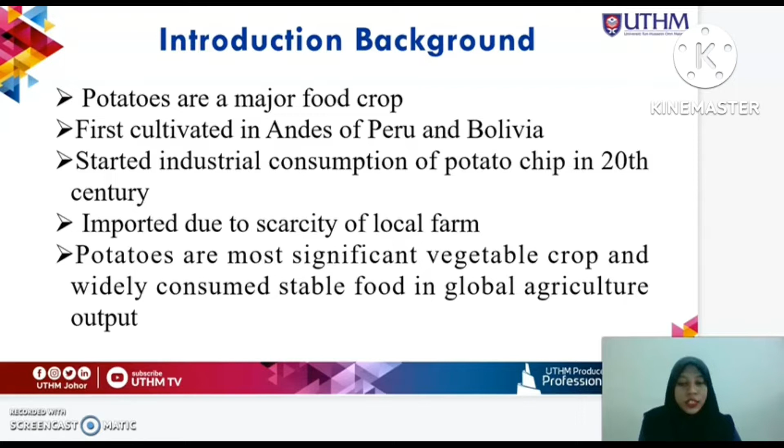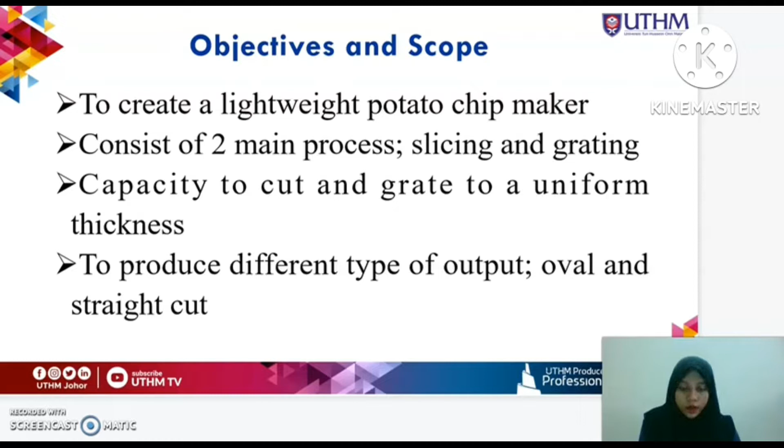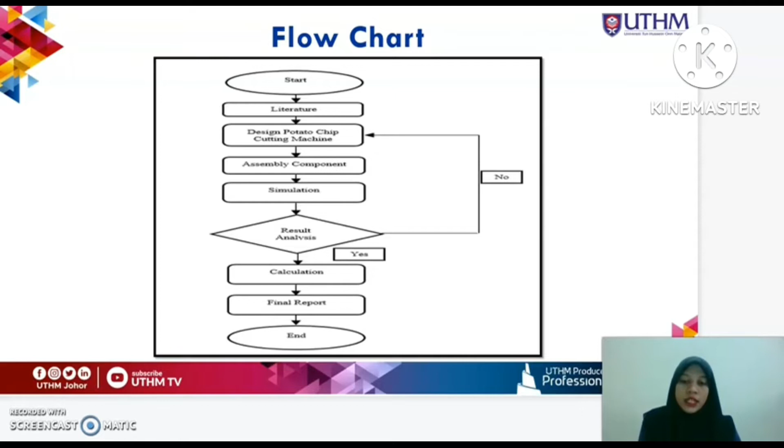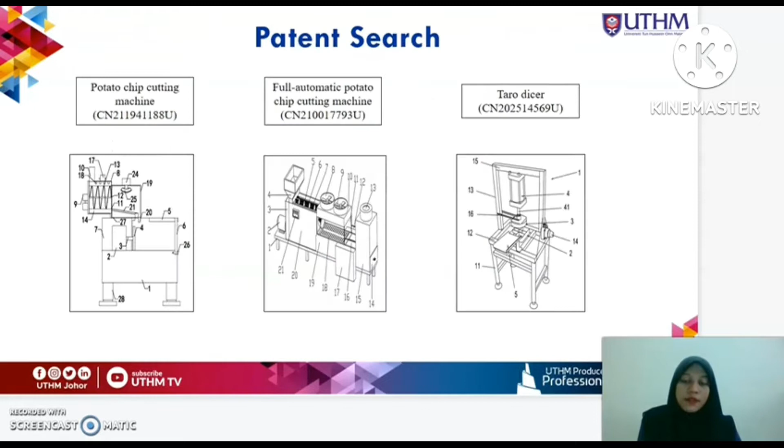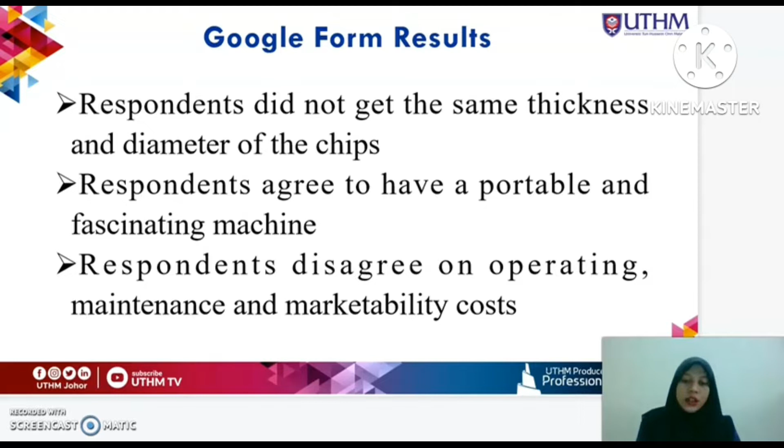For chapter 2, define tasks, we have three patent searches that we need to compare with. From the Google Form results, we knew that respondents did not get the same thickness and diameter for the chips, and they all agreed to have a portable and fascinating machine. The respondents also disagreed on operating, maintenance, and marketability costs for the machine.

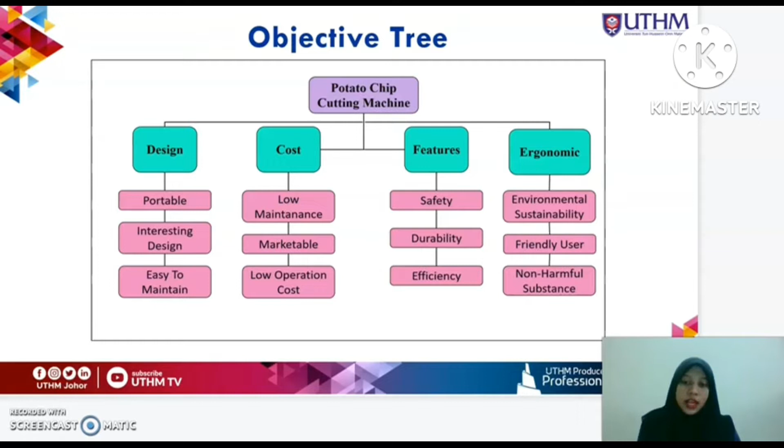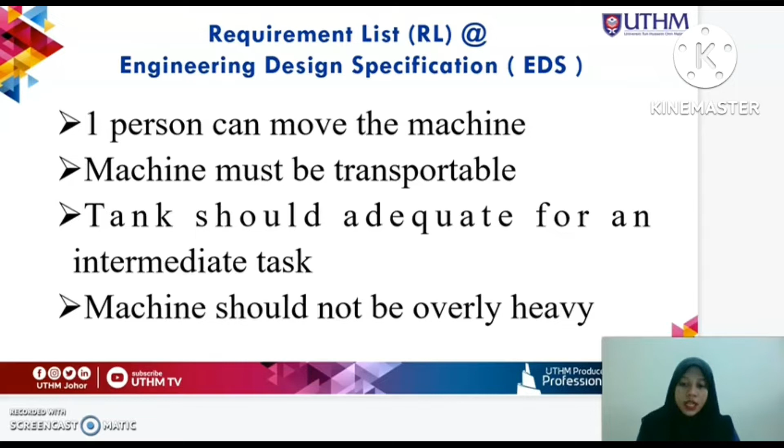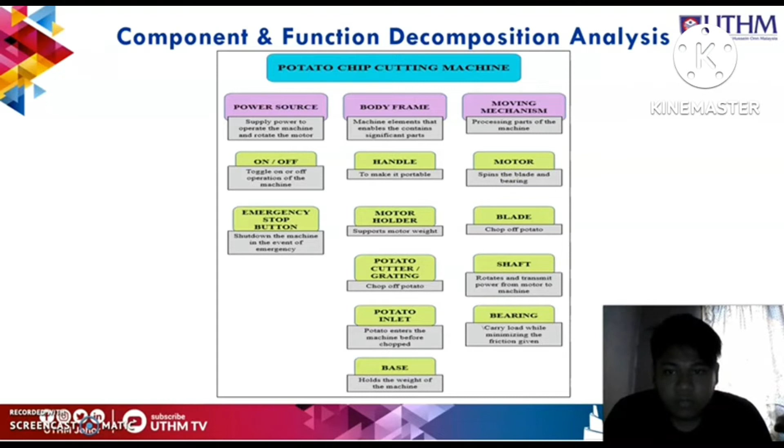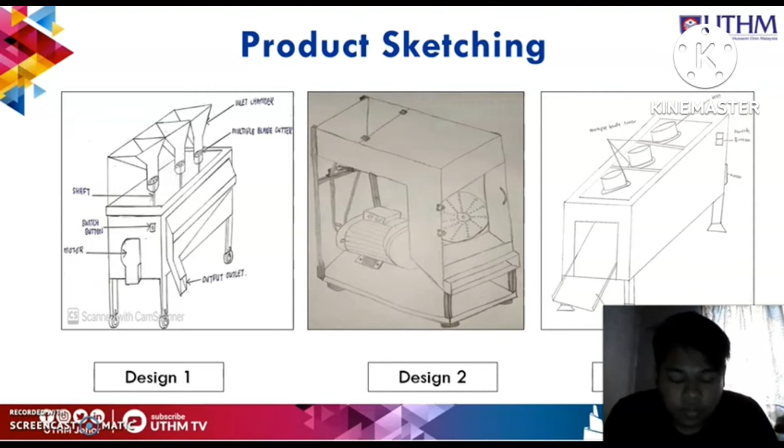For chapter 3, conceptual design, component and function decomposition analysis. This is the potato chip cutting machine for the power source, body frame, and moving mechanism. As you can see, this is the product sketching, design 1, design 2, and design 3 for the potato cutting machine.

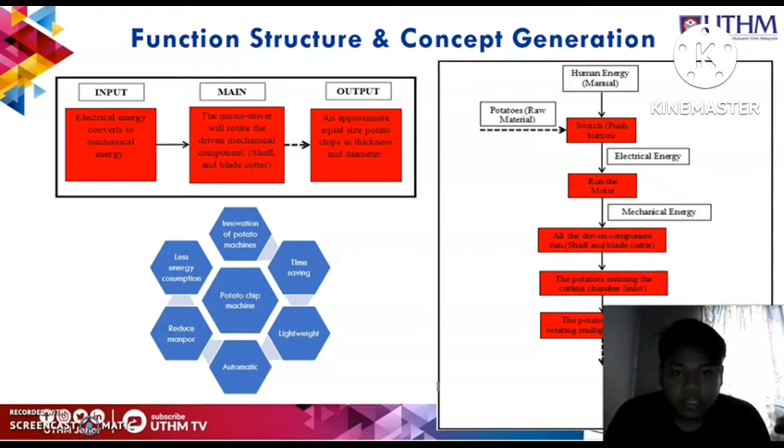For the function structure and concept generation, as you can see, from input, main, and output, electrical energy converts to mechanical energy. The motor driver will rotate the driven mechanical components, shaft, and blade cutter, producing approximately equal size potato chips in thickness and diameter. For the concept evaluation, there is an 11-point scale and the description. And the concept selection: body, wheel, shaft, and blade cutter.

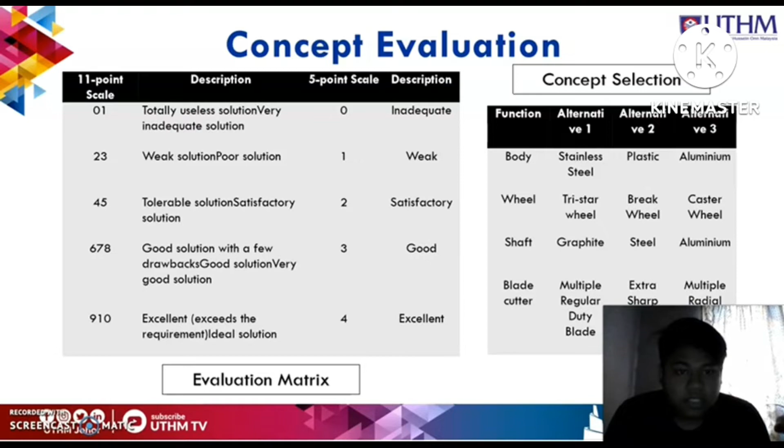The motor runs, which involves mechanical energy, and all the driven components rotate, which involves transmitting movement. Next is the action of the machine. The potatoes or raw materials enter the cutting chamber, known as the inlet. And lastly, the material goes to the output, where the material obtained is in chip size, and the potato is cut by the rotating multiple blade cutters.

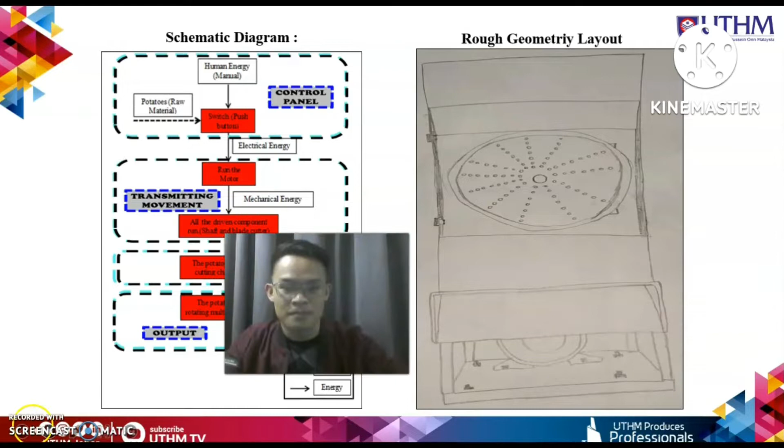Next part is the interaction identification when running the motor, which summarizes the movement involved in the motor, which is by control panel. Next is through transmitting movement. Next is action, and last is the output. Output of this machine is the chip size of the potato, which is cut by the blade cutters.

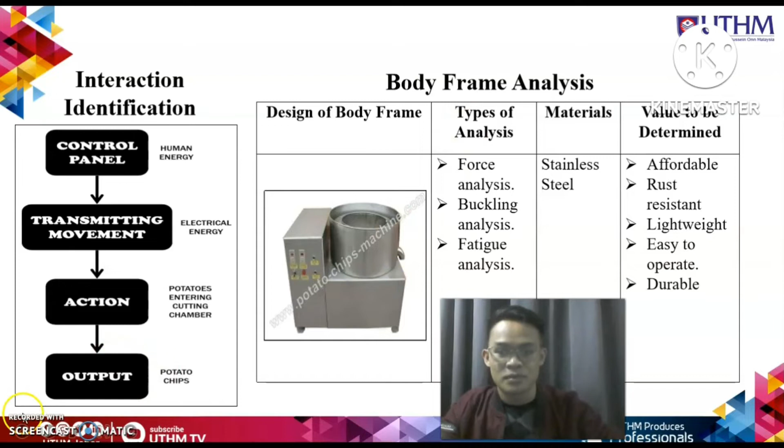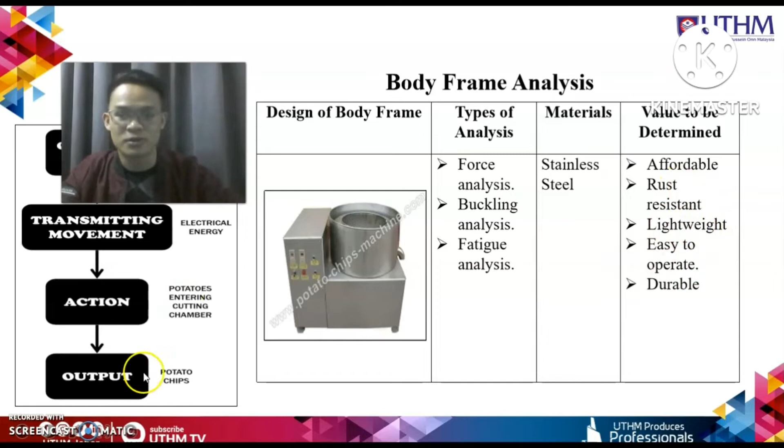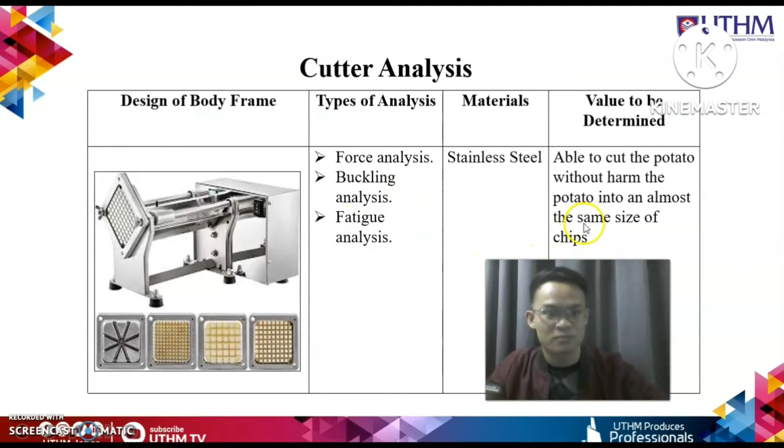The material is likewise stainless steel, and the value to be determined is being able to cut the potato without harming it, into chips of almost the same size. Besides cutter analysis, body support analysis is also involved in the design of the machine. The figure on the side shows the design of the body support, and the type of analysis is exactly the same as the cutter support.

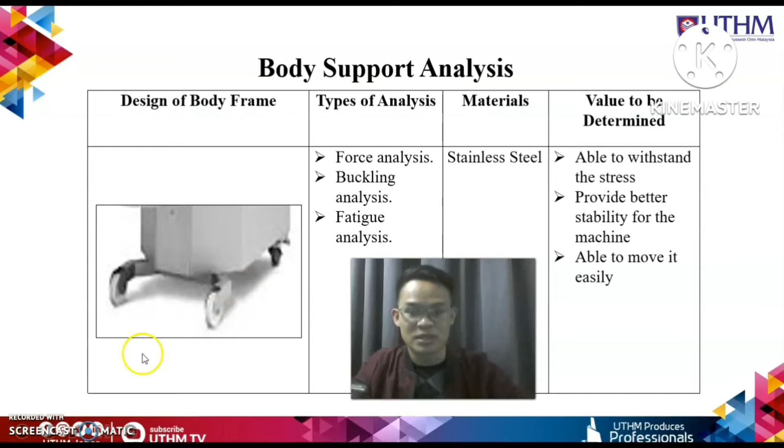The material is determined to be stainless steel, and the value to be determined is being able to withstand the stress to provide better stability for the machine and to move it easily. Specific components involved in the rotation and mechanism movement of the machine include bearings, quantity 4 bearings. Next is the shaft, which consists of 3 shafts. Next is the gear set. There are 2 gear sets installed in the machine, and lastly the nuts.

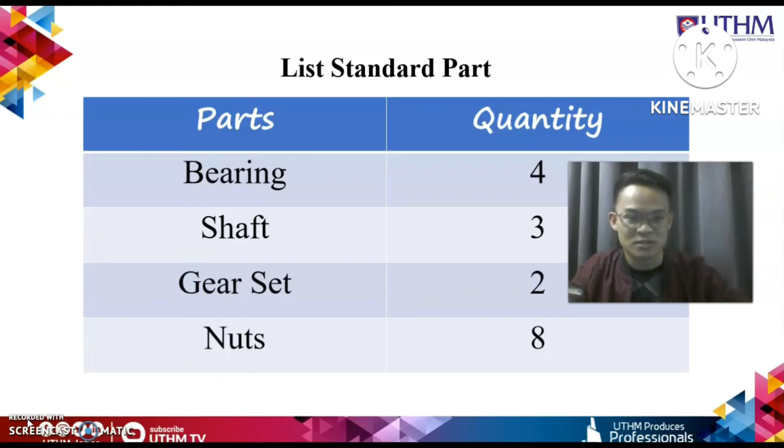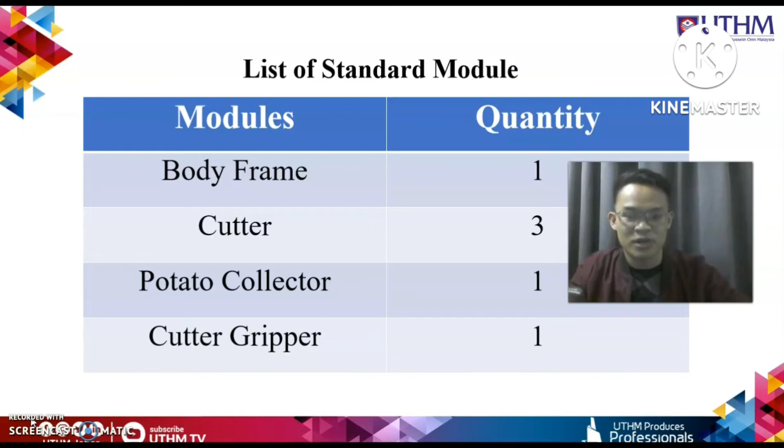The standard modules for the machine: first is the body frame, quantity 1. The cutter is designed with 3 designations of blade. Next is the potato collectors, and for the cutter grippers, it installs 1 quantity.

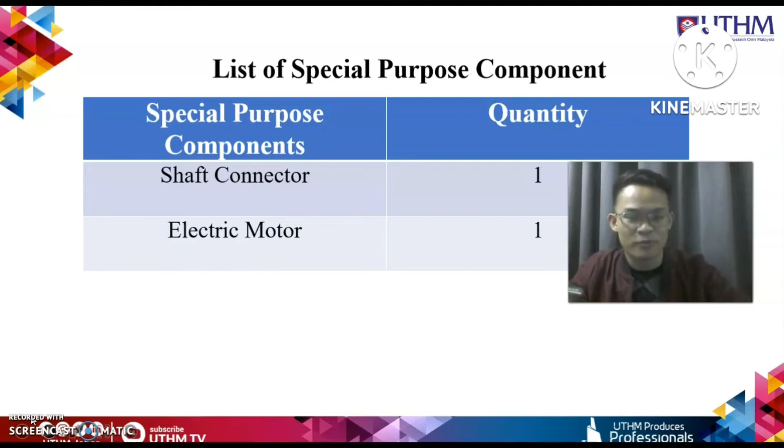Next is about the list of special purpose components. The machine also involves special purpose components such as shaft connectors and electrical motors.

Next is about designs for functions, known as mechanical engineering design elements. Next is sustainability elements such as environment, social, and economy. The design also needs to consider reliability, like design for assembly, ergonomic considerations, published standards, and lastly, design for environment.

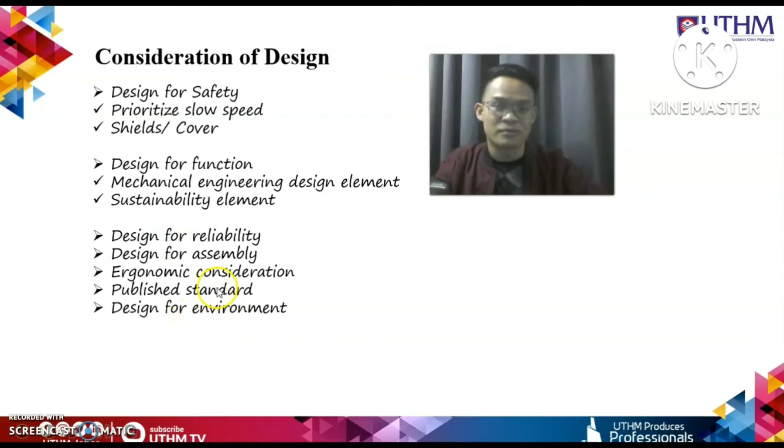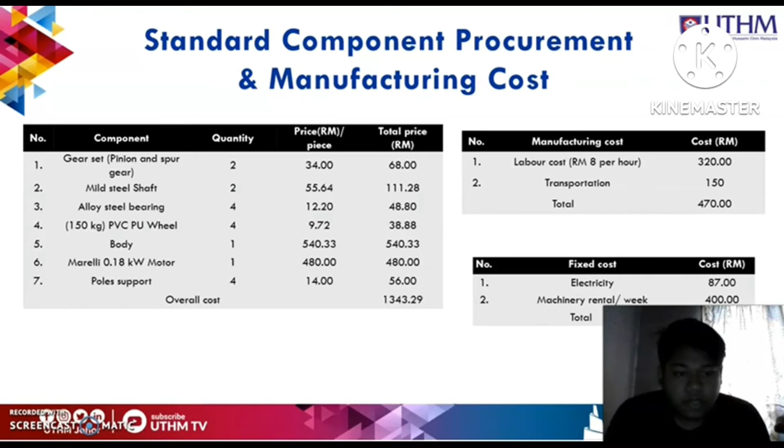The standard component procurement and manufacturing costs. As you can see, the overall cost is 1,343 ringgit and 29 cents. For the total manufacturing cost, 470 ringgit, and the fixed cost is 487 ringgit.

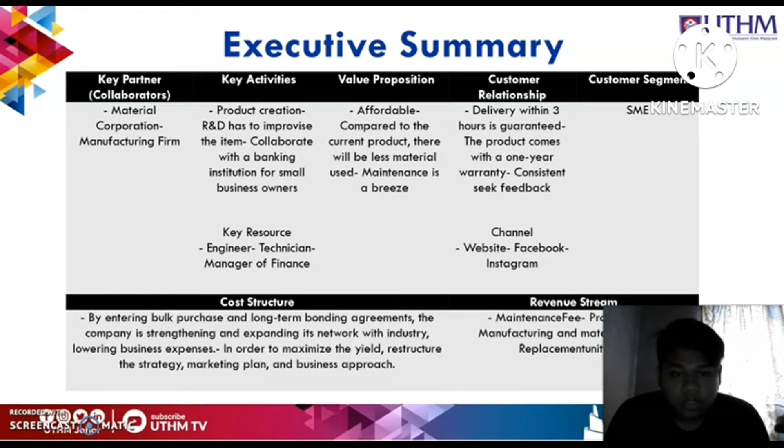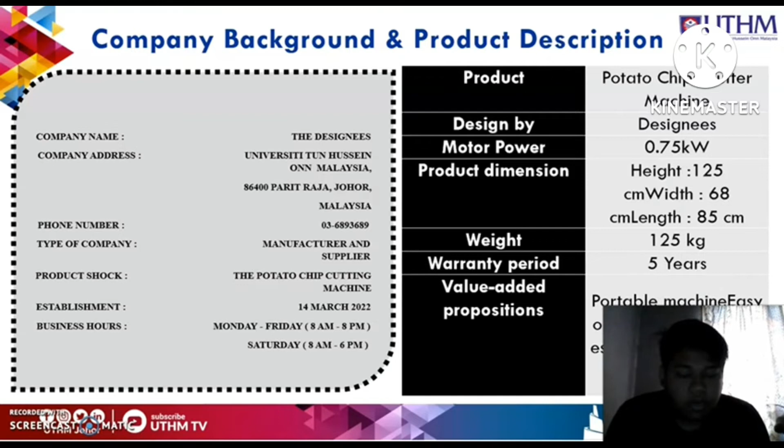Company background and product description. The company name, the designees, and the product is potato chips cutter machine. The motor power is 0.75 kilowatt. The product dimensions: height 125 cm, width 68 cm, length 85 cm. The total weight is 125 kilo. Warranty period 5 years.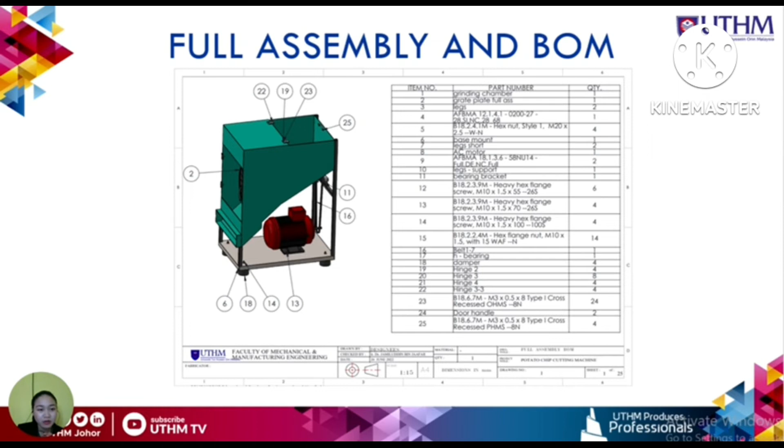As you can see here, this is our full assembly of our product, which is the potato chip cutting machine. There are 25 parts of this product. This is a detailed drawing for the parts of the potato chip cutting machine.

Let's move to the simulation analysis. First, we do the simulation analysis at the main structures according to the von Mises distributions. The color red represents the critical value, meanwhile blue represents the safe areas. From the result of the stress distribution, the maximum value of stress distribution is 6.38 exponent negative 3, and the minimum value for stress distribution is 1 exponent negative 3.

The figure on the right shows the deformation of the main structures. This deformation occurred at the red color area because there is stress due to the weight of the motor in that area.

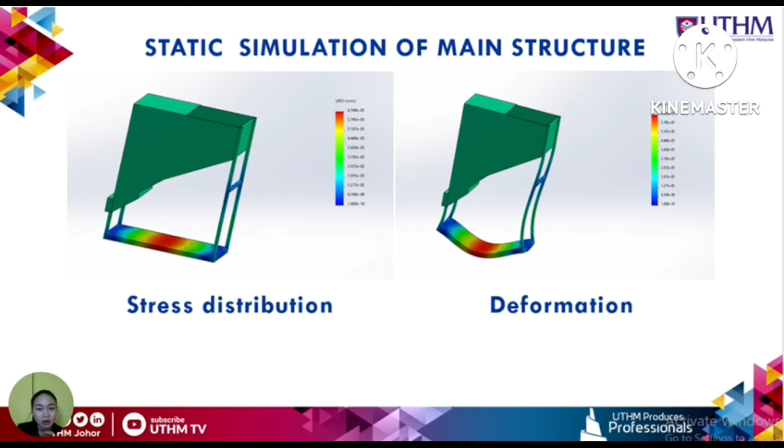Besides that, we also do the static simulations at the shaft. After setting the gravity, temperature, and force, the static study was successfully performed.

From the static simulation of the shaft, we obtain the results for buckling, von Mises, fatigue life, frequency, displacement, and fatigue damage.

The maximum value for buckling is 3.81 exponent negative 3. For the von Mises, the maximum value is 1.796 exponent 10. But here there is a yield strength result for von Mises, which is 6.2 exponent 8, and this yield strength is greater than the critical value. So this shaft is still safe.

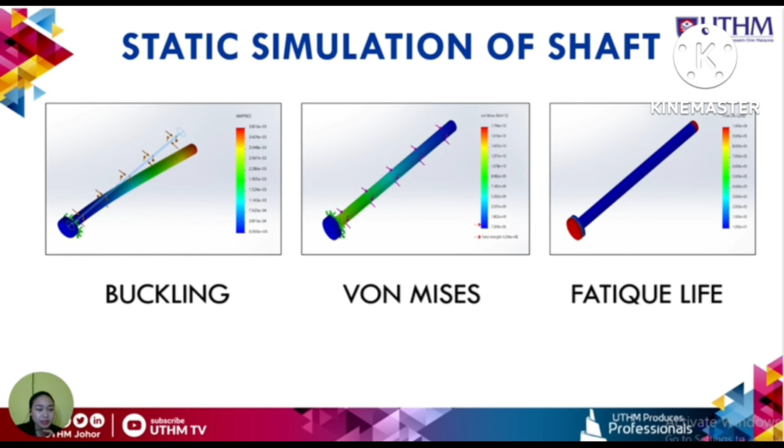For the fatigue life, the maximum critical value is 1 exponent 6. For the frequency, the maximum value is 2.58 exponent 1. For displacement, the maximum value is 2.283. And the last one is fatigue damage, where the maximum value for the critical is 1 exponent 4.

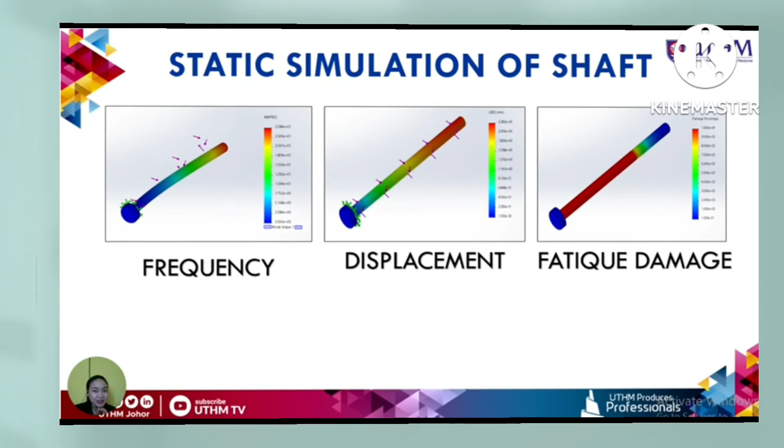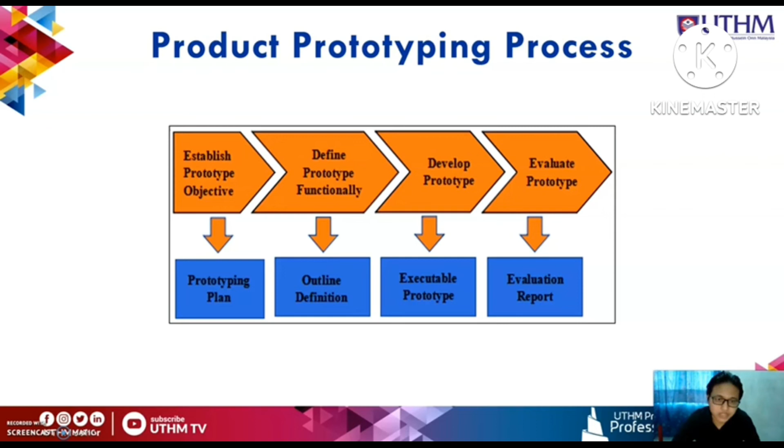So we go for the product prototyping process. First, we establish the prototype objective, which is the prototype plan. Second, define prototype functionality, where we outline the definition. Third, we develop the prototype, which is executing the prototype. Last but not least, we evaluate the prototype, making an evaluation report.

So this is our final prototype of the potato chip cutting machine. And we go for the functional checklist.

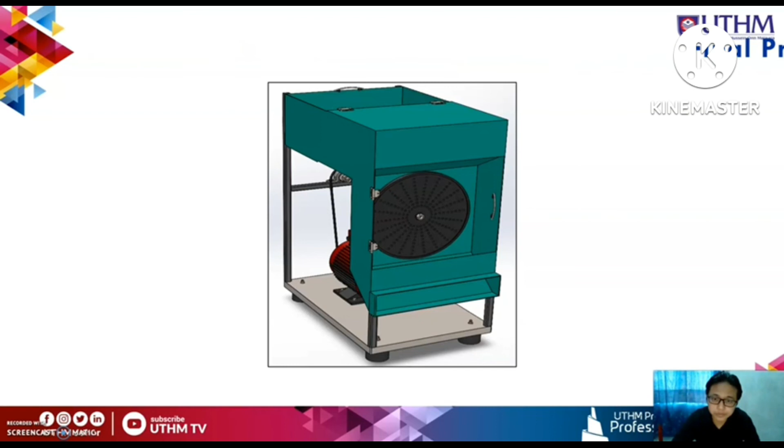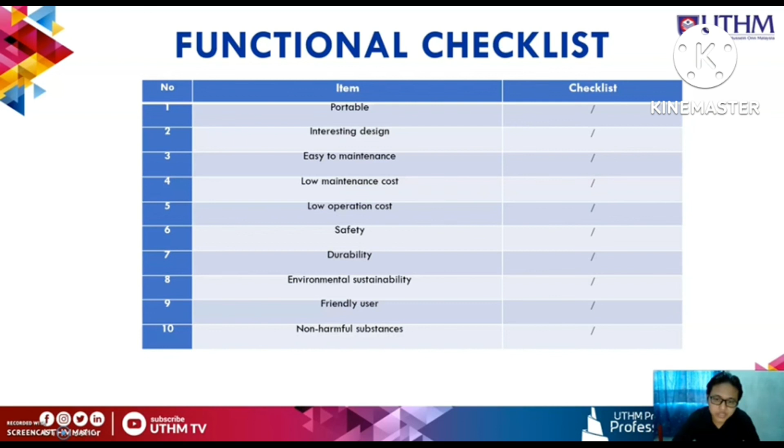First, portable, interesting design, easy to maintain, low maintenance cost, low operation cost, safety, durability, environmental sustainability, user friendly, non-harmful substances—all checked. Next, we go for the material checklist: main structure to support the whole machine, grinding chamber to store the potato.

Rubberized machine sole to give shock absorption, legs to give stability, grating plate to grate the potato, belt to control the grating plate, and shaft to control the belt.

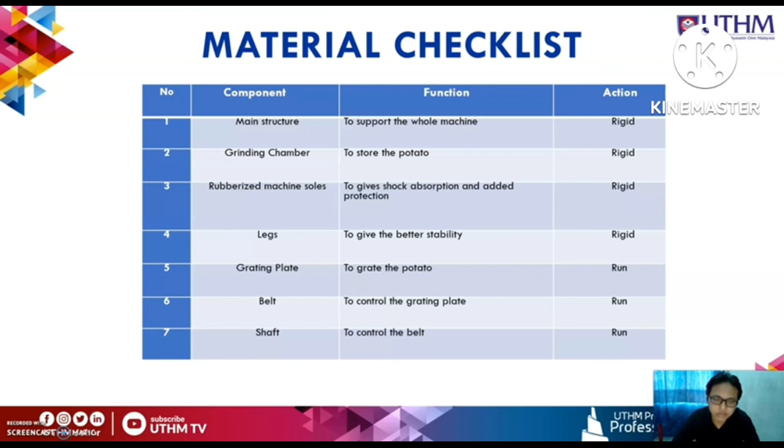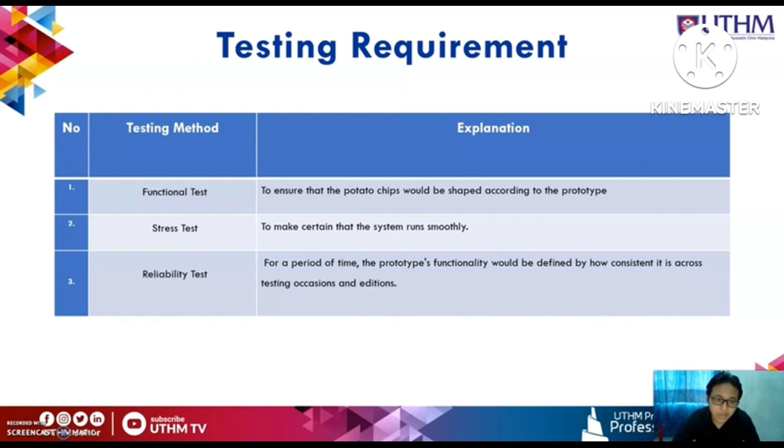And testing requirements: first, functional test to ensure the potato chip will be shaped according to the prototype; stress test to make certain that the system runs smoothly; and reliability test for a period of time. The prototype functionality will be defined by how consistent it is across testing occasions and editions.

So we go for chapter 7, sustainability and environment consideration in engineering design. This is our key priority in this project. We have 3 pillars: economic growth, social equity, and environment protection.